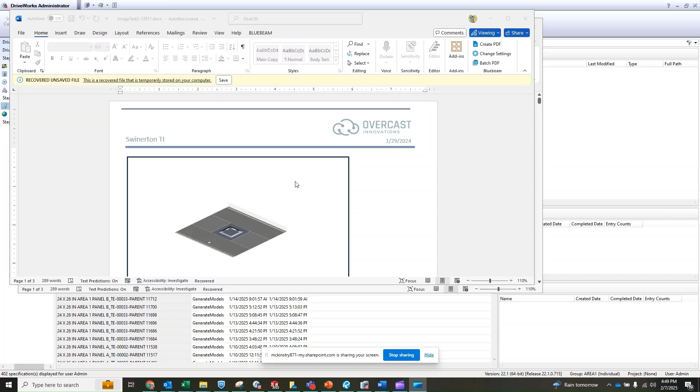All right, I'm going to do a quick demo of DriveWorks here. So to start off with, I will be an administrator.

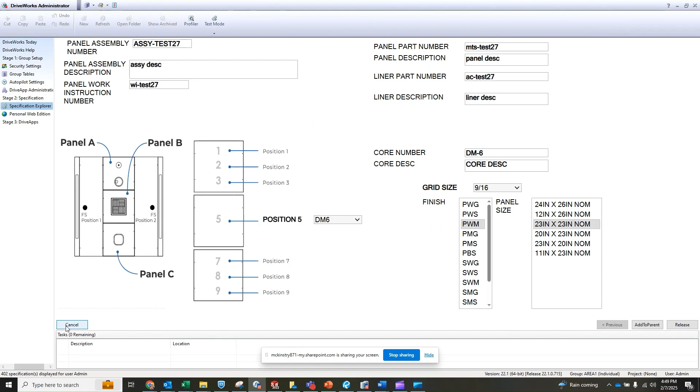I'm going to start a project. We've got parent and child projects. So the way this works is, in a parent project, you can add a product in the child spec table, or you can import a child spec, a bunch of children rather. So I'll just go through the import to start with.

So I'll select a CSV, import, and it brings in my data. So you can see we've got 12 items, and the import table just has a bunch of inputs that I've selected.

So we're going to generate the models now. So when I hit this, it will change all of our specifications and move it to a place where I can generate models.

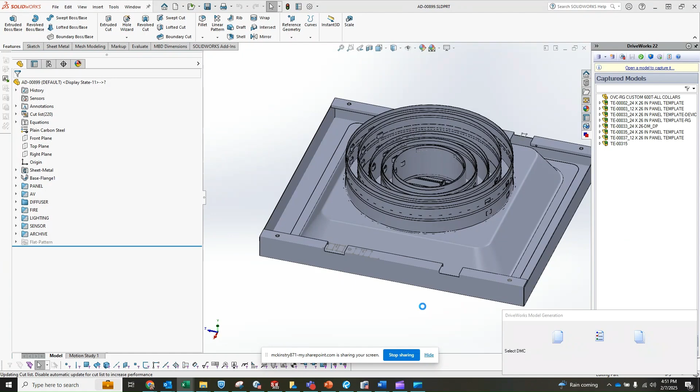Okay, so it's got my template open and it's deciding which features to suppress. It's changing the color, it's changing the description in PDM. So it just took all these models and then down-selected to the one I needed.

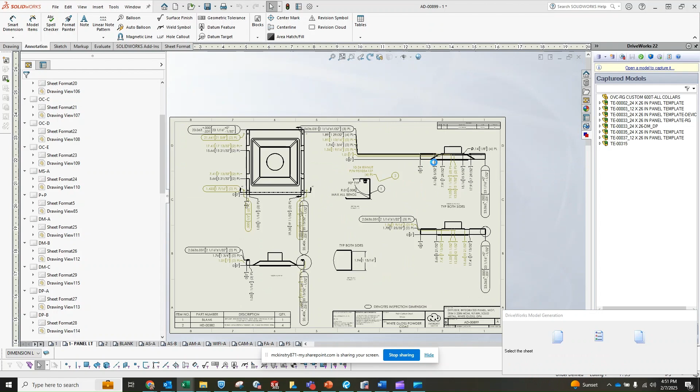Okay, right now the software is deciding which tabs to keep open. We've put custom dimensioning on all the features and put each feature on a separate sheet, so the software can quickly go through and decide which pages to keep based on which features are selected. So right now it's just deleting all the pages that are not applicable.

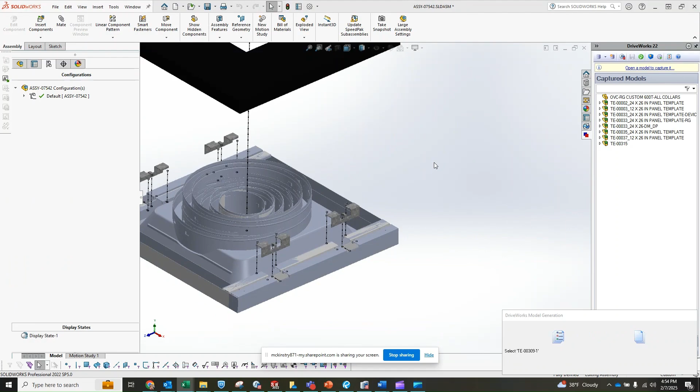Now we're on to the work instructions section. So here we've put all of our models, all the different variations, into one assembly, and then made all the documents for that assembly. This moved pretty quickly, so I didn't get a chance to explain through it, but that assembly just looks pretty insane. So we'll take a look at it.

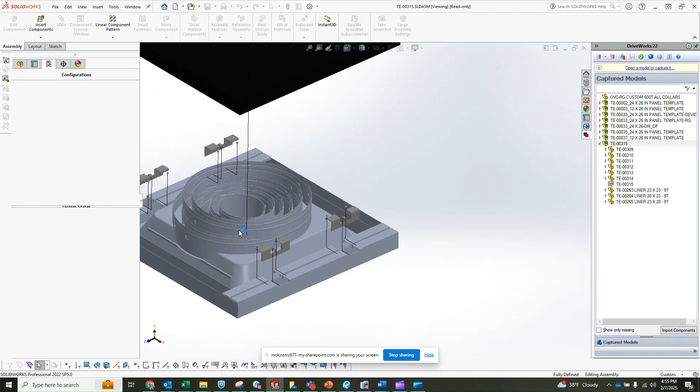So this model takes a little bit to open up, there's quite a few features in it. So take a look here. What we've got is a part template for each size. So I can hide these to kind of show you what they are.

All right, so here's one model and then the exploded view. So I can collapse the exploded view here, and you can see what our model looks like. We've got these brackets that actually move independently, so I've got them on a different table.

It just worked out better for... oops, I've hidden too much here. What have I hidden? Oh, probably this. Okay, so I'll keep that up.

So these brackets will essentially flex to the correct size. And the issue is with mating. So when you mate to these features, if you end up deleting that feature, then it has nothing to mate to. So essentially a lot of these things you have to drive independently from these other models.

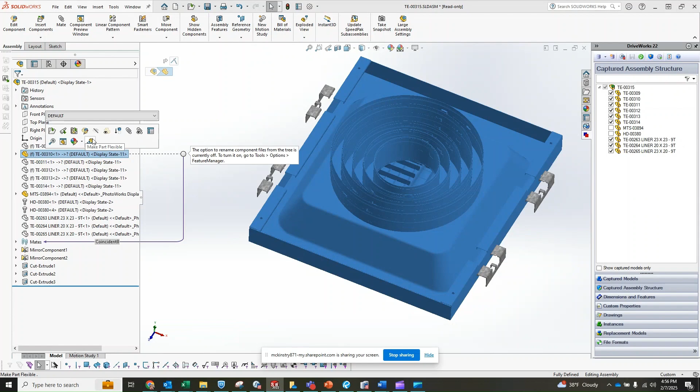So we'll just go through here, and they all exist here, all these different sizes. And these are slightly different sizes, just to show you. I can show two of them to show there's two different sizes here. We just centered everything, mainly for the work instructions, but it just kind of streamlined everything to put these all into one. So every single one of these models has, I'll just say, a lot of features in it.

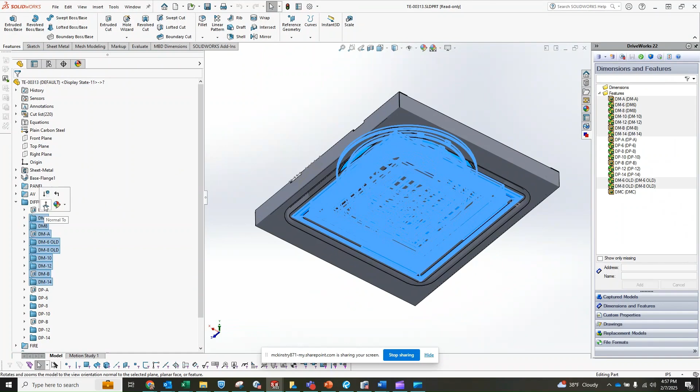So they're mainly, these are diffusers. We've got two different variations in here. Let's take a look at one. Let's press these. So then we've got, these are called plaque diffusers. We've got two different sizes of plaque diffusers.

These are called modular core diffusers. Each of the panels themselves has different size openings associated with them, and these modular core diffusers in them. So they're all sort of a full suite of parts.

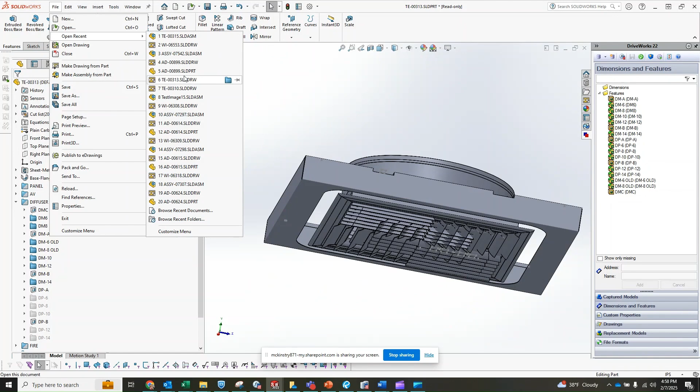So one of the things that happens is the color drives to everything, and the material. So if I take a look at that model I just created, it's actually in my recent history here. Take a look here, so it's made of plain carbon steel. The color is driven to it.

So if I look at my custom properties, we've got a color associated with it. It is plain carbon steel material, and the color is right here, which is actually just an RGB value, and then the color is called out in the description as well. So this description, this data is all very structured and being pulled in from a table.

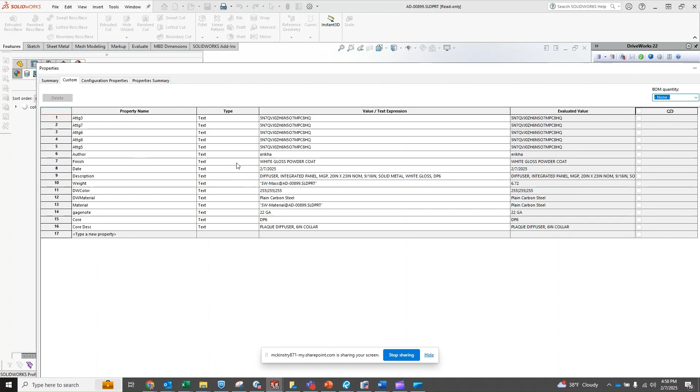All right, so it's just the parts and the data, and also I want to show you the final work instruction. Take a look here. Actually, we can probably just search in here for it. Okay, so here's our work instruction with the various parts we called in.

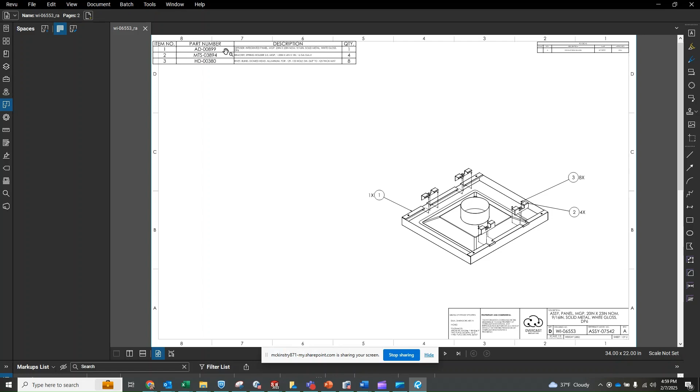Okay, on our next page, these notes are all customizable. So based on the selections made in the form, we can change these notes, change any features in and out we want to, change the sizes, and so forth. So if I look at the form itself, that might be interesting to look at. I won't get into the complex parent-child relationship, but I'll just say that the child project is the basis of everything. So these are the inputs required.

Sorry, a second here. There we go. So we've got names for various things, descriptions, the various file types we created. So we created a panel part, a panel which required a description, created an assembly, and we created a work instruction. So those are the main inputs.

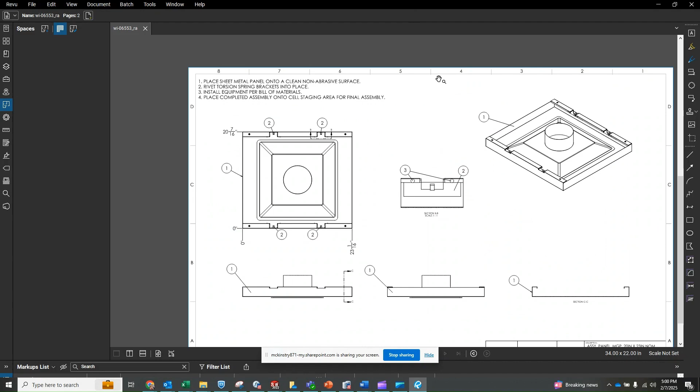This core description was driven into the bill of materials that we had in the work instruction, or rather in the part itself. And then we've got our finishes and our various sizes. And then if we test here, we can see the drop-down menu we created for the various sizes. So that is this website.

We've sort of taken this and gone a different level too. So if we take a look at live, we've gone to live, and if we go to login. So here we're logged in to just a website. We could get it as a secure website, but for us, this is an internal tool and it is not secure. All right, so here I'm starting my project. I can simply log in here.

First, I have to create a project name, and the project name comes up here. We'll put a revision in. I think I'm pretty far in my revision, so let me take a look here. Okay, 53 is my next revision, which I'm about to do. Okay, so now same thing. I can import child specifications, or I can add them in the table here. So I'm just going to add one.

Okay, so first I'm going to give it an ID, 22. All right, then I will go through my form here and just select some options. You can see some graphics change when we do this. Let's see, we're going to different sizes. Maybe we want a different perimeter. We're going to go to a 6-inch perimeter. And then the colors, you can see them all listed here.

We can definitely do some things in the graphics side to make selection more obvious, such as putting a box around things, maybe highlighting text, and so forth. But for now, we'll just go with the simple model here. I'm going to go with black. I'm going to go with the black trim.

Lighting. So this is lighting in area 1. So we can put lighting in various sections. So I'm going to put the light in to A and C, make some selections here on my light. Okay, so I'm selecting my center panels here. So I'm going to select perforated black. Okay. And then I'm looking for lighting in area 2.

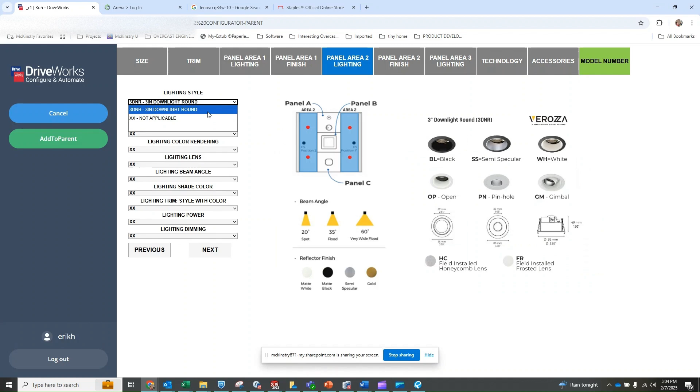I don't think I want any lighting there. I'm going to put in wood, and I'm going to go with a teak stain in area 2. And the lights. Okay, so lights, I also want to be black because I picked a black exterior. Okay, and then we'll go with a 3DNR light. All these selections are made. That looks good. Okay, so in this one, I put lights in position panel A and C.

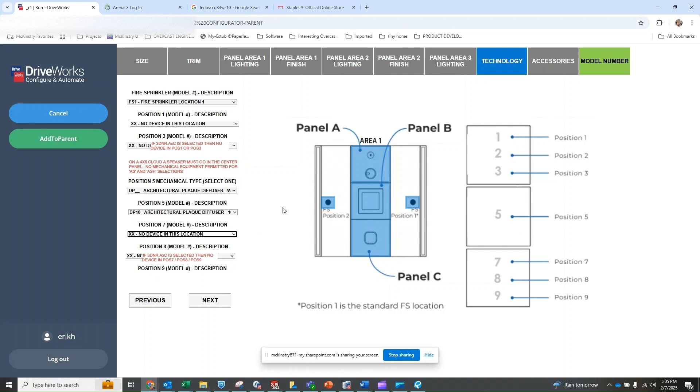So I cannot put, if you see here, there's a note saying if 3DNR selected, no other lights in this position, or no other equipment. So here's the same thing. I can't put any equipment into panel C, but we can make changes here on panel B. So I'm going to go with a plaque diffuser, 10-inch, and we'll go next. Okay, I don't need better acoustics, and that will do it.

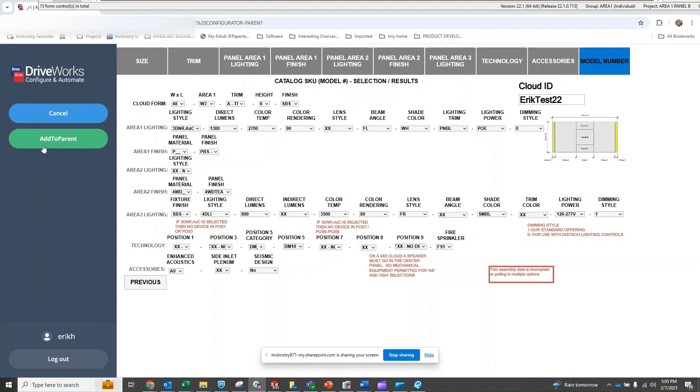Okay, so now we've got all the selections we've made. It's giving us a warning saying the trim assembly is incomplete. We'll have to take a look at that error, but either way, the product is ready to produce. I can actually take a look here and see if I can replicate it on my end. But anyways, this problem can be troubleshot. We'll just add a parent for now. Okay, so now I've got one project in here that's probably enough to see how it works.

So the first thing I'm gonna do is export project data. I'm gonna explain this, but to start off with, I'm gonna do my next step, which is generate model. So I'll select generate models here. All right, so now this is working. It's creating a work instruction for me. And first of all, it takes the data that we've put in. These were all the selections that I made in the form, in a CSV, and obviously if there were more child specifications, there would be more here, but for now, this is just the data that we've selected. The other thing that it generates is a bill of materials.

So if I select on that, the idea is that you would have a large project and a lot of data coming from that project. Each specification would have, I think, around 57 selections made, and that boils down to this bill of materials that's been created. So you can format the CSV so you can just take it and import into any software that would kick out a full bill of materials. We use a PLM system. I would definitely recommend having a PLM system. I believe there's other options too, like an enterprise-wide system. So either one of those two softwares will work. But anyways, that's how I have it set up.

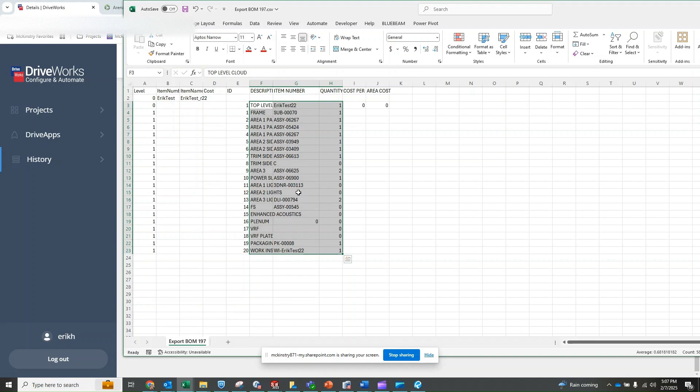And we can see here, we're still generating the model, so just wait here while it generates. Usually you can step away at this time. You're not going to watch it generate. You're going to create all your models and then walk away. You can also set it up to get a notification that it's done generating. In general, these were taking around 2 minutes to generate, but I would expect maybe 5 minutes for something this large. So we will just wait on this video, kind of fast forward, and you can see the final output.

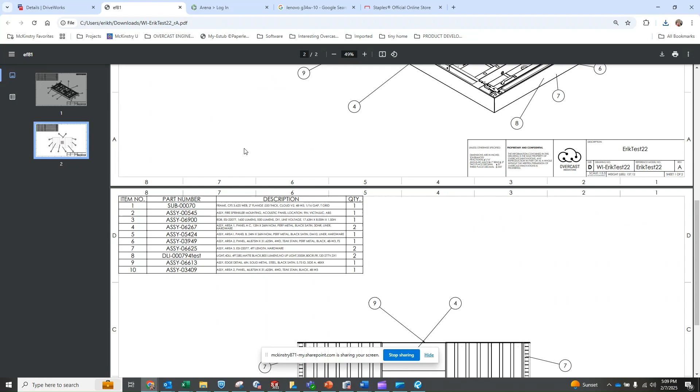Okay, our document's been generated. I'll download it here. Okay, we can see what we selected here. We selected wood slat. We've got our bill of materials coming in clean. Our 6-foot light. Oh, we can see that assembly error that didn't come in. So we'll take a look at that. That error is definitely resolvable. It's just a data selection error.

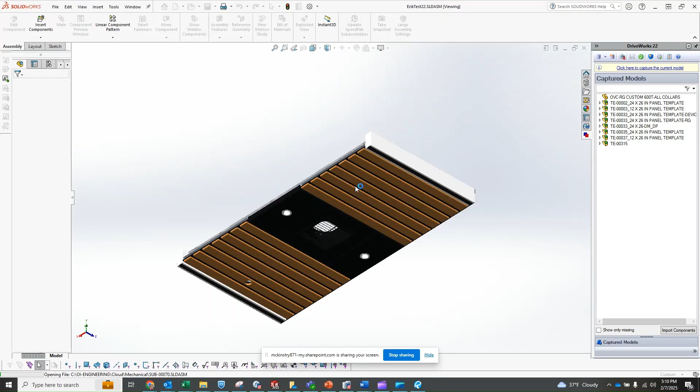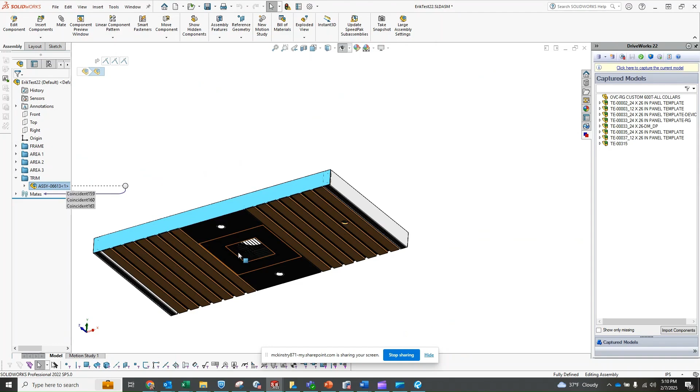So, all right, let's take a look here at the model itself, so you can see the colors and whatnot. This recently generated. Oh, it was on that machine. Let me go to that machine. Okay, so here's our product that we created. So black panels for sure. We didn't actually drive the color to the light, so that's why that's not coming in the right color, but I will show you on the back end we were ordering the correct black lights. If we look at the trim, it looks like it only brought in one, so that's definitely a data sorting issue we'll have to look at. So, yeah, that is our final product. There's our modular core diffuser and our lights in panel A and C.